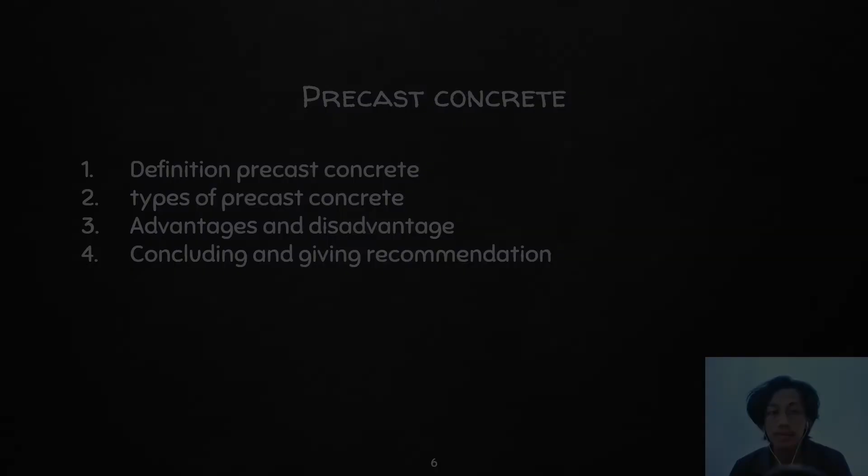Did you know concrete has been used since centuries ago and is still a favorite to be used as a construction material or element? Global concrete consumption is double that of wood, plastic, aluminum, and steel collectively.

In fact, the United States concrete production industry generates $30 billion per year and even increases every year.

Concrete has good strength and durability, but the price is still quite affordable, so it becomes one of the important elements in development. In addition, concrete has construction needs such as building construction, as building structures, road construction, bridges, and so on.

The process of making concrete is growing over time, and technology in the field of construction. Initially, concrete can only be made and cast directly on the spot, or conventional concrete. Until then comes precast concrete.

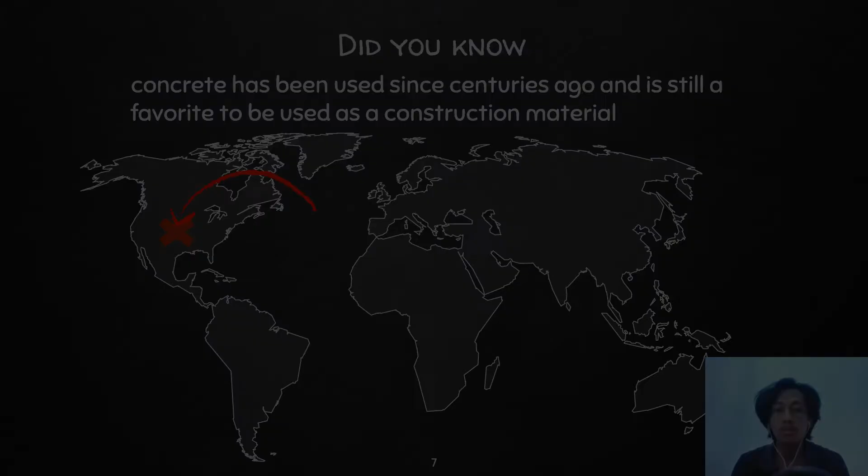In this discussion, we will review more about precast concrete. What is precast concrete? According to Wikipedia, precast concrete is a construction product produced by casting concrete in a reusable mold or form which is cured in a controlled environment, transported to the construction site, and lifted into place.

In my opinion, precast concrete is concrete that has been molded and made in advance in a factory or a special place apart from the construction site. The concrete is made based on certain molds and sizes that have been adjusted to the needs in the field.

Not only that, this concrete is maintained and well cured according to applicable standards until it reaches the curing age. The curing process aims to maintain the moisture content in concrete so that the quality is maintained and guaranteed. This process is carried out in various ways, ranging from watering the concrete surface, wrapping with wet sacks, steam curing, and other handling methods.

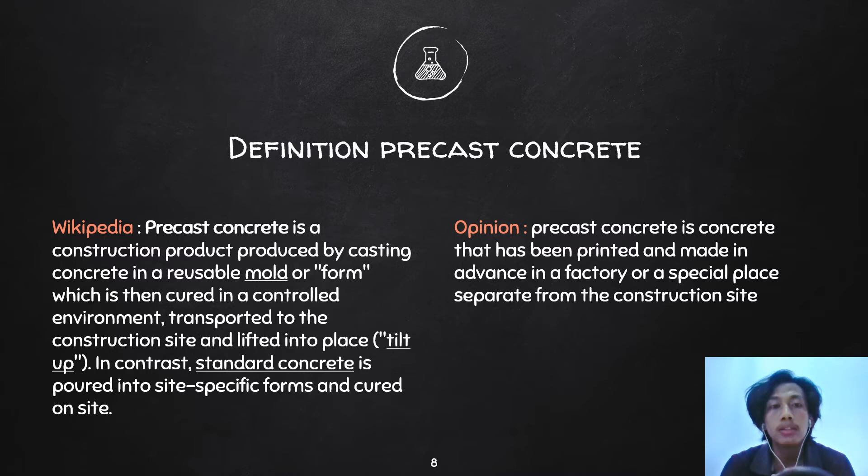Once the concrete has reached the curing age and is ready for use, it is then sent to the construction site for installation.

Types of precast concrete. Number one is concrete panel fence.

The first type of precast concrete is the panel fence, which is a concrete element that can be used as a guardrail. This type of concrete panel fence can be installed in large locations such as factories and offices, as well as smaller locations such as private houses.

Number two is U-Ditch concrete channel. U-Ditch is a channel usually used for waterways or irrigation canals. Its main function is as a waterway that can carry or drain water and can infuse some rainwater into the ground.

Number three is box culvert precast. The function of box culvert is the same as U-Ditch, which is a drainage canal. The difference is the box culvert precast is box shaped, has a spigot and socket, so it cannot absorb rainwater into the ground, due to the characteristic of this material, which is impermeable to the influx of rainwater or extraction.

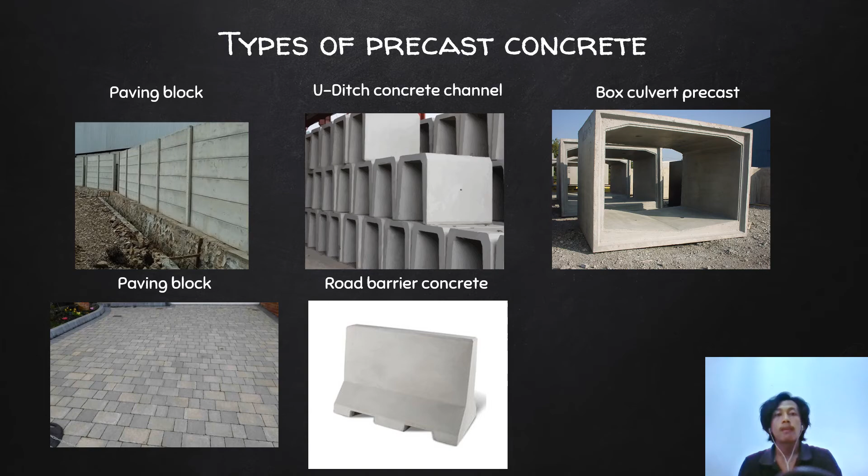There are six advantages of precast concrete. Number one, precast concrete has good quality because the manufacturing process is done by good and correct methods, and the maintenance is also very well considered in accordance with applicable regulation. Number two, precast concrete has a high level of resistance to drastic weather change.

This concrete can be very reliable if the conditions at the project site are uncertain, and in addition, the installation of precast concrete is also not affected by the weather.

Number three, precast concrete can cut project implementation time significantly. This is because the use of the concrete allows the project work to be done overlappingly. For example, when the work of the structure is still in the foundation stage, then the implementation can be simultaneous

with the manufacture of precast concrete for floor columns. This way, when the bottom structure job is complete, the column is ready to be paired.

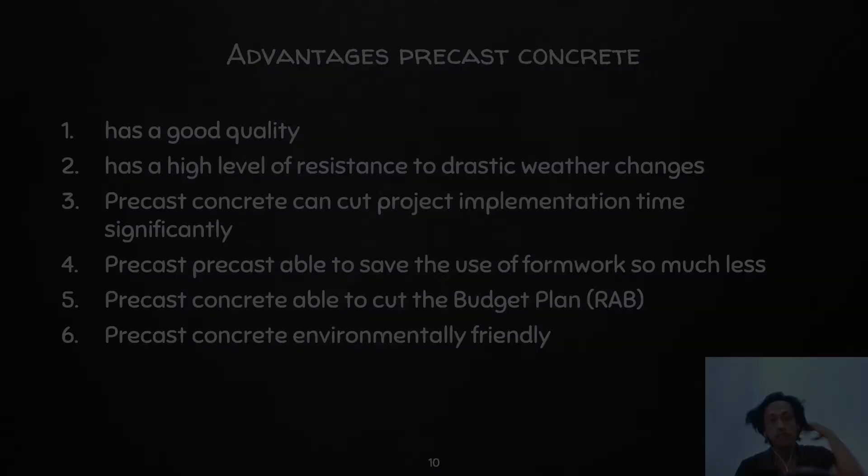Next is the disadvantage of precast concrete. Precast concrete also has disadvantages, including number one, precast concrete requires additional cost to transport this concrete from the manufacturing plant to the place of project implementation. Number two, precast concrete requires complete heavy equipment for installation.

Conventional tools alone cannot be used to install components of the structure perfectly. Number three, precast concrete should be placed in a good place and properly maintained until the installation time. So the project site must have enough space to store this concrete.

Number four, precast concrete also often takes a considerable unexpected cost. For example, when the installation of precast concrete elements, additional costs are needed for the purpose of connecting.

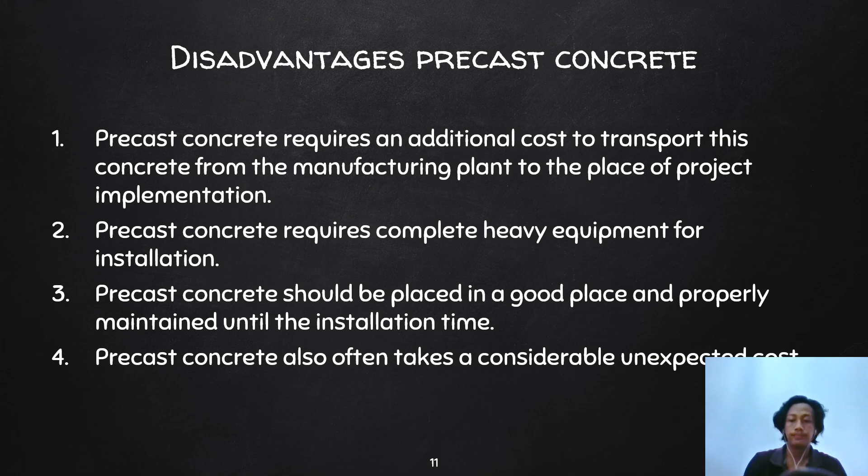Concluding and giving some recommendations. From the description of the advantages and disadvantages, precast concrete usually has better quality and has practical value. However, I do not recommend using precast concrete if building on a small scale, because in addition to making it inefficient, it also has a more expensive price than conventional concrete.

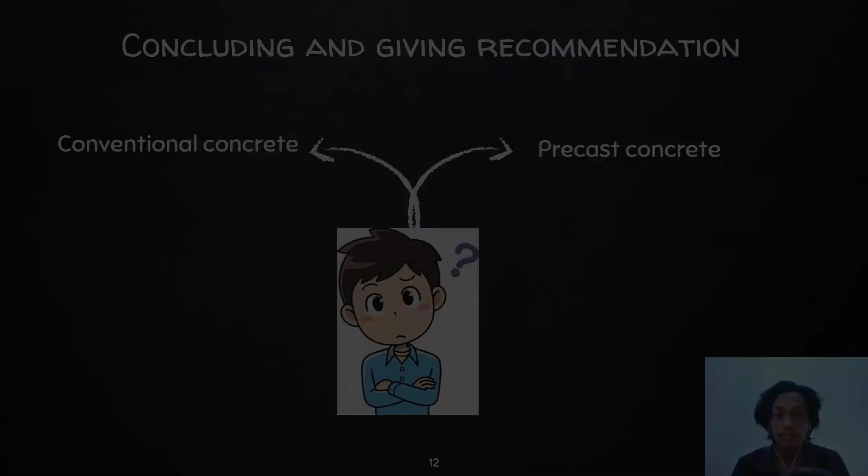That's all for my presentation.